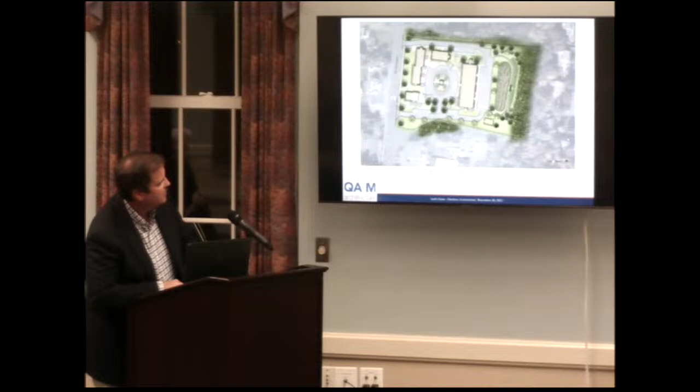And the driveway wraps around the backside of the building, if I could see where my cursor is. Sorry about that. It might be easier for me to point. You can pull the microphone off of that. Thank you, that's easier.

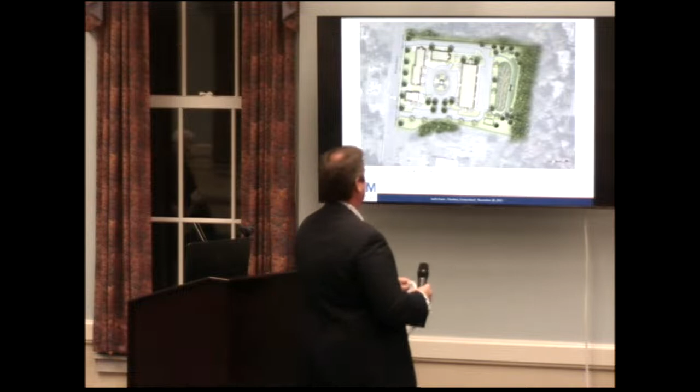The driveway wraps around the back of the barn building, which is the apartment building, and has parking in the rear.

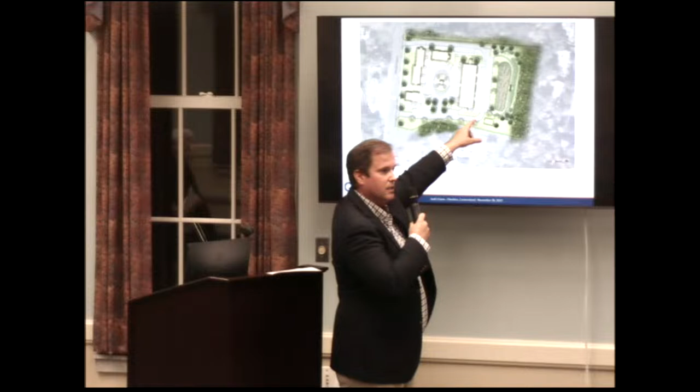Mr. Bowman, you need to let the audience see more than you need to let us see. We have everything up here on paper. I'm not sure if they can see it very well, but sure, I absolutely think that's better, thank you.

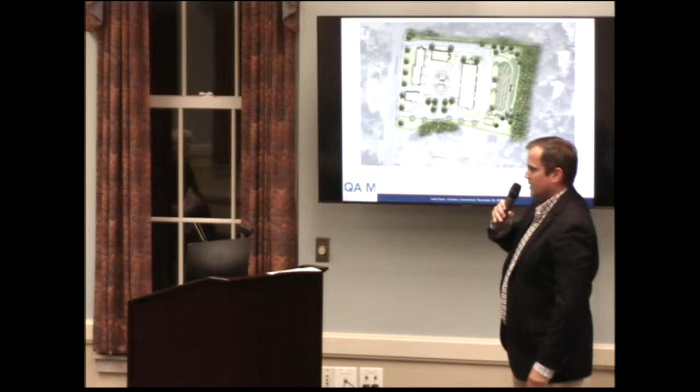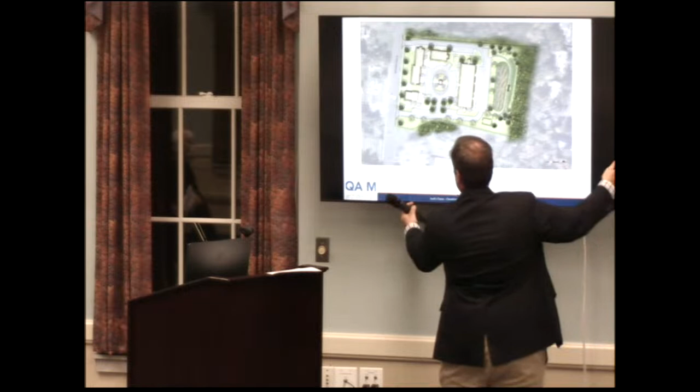And then around the backside, the driveway loops around and has an exit out the north. Oh, I don't think it- no, she's just asking if it actually does a little bit. Would you like me to try? Is that better? Sure thing. Would you like me to back up or would you like me to keep going?

I'll just describe it. So this is the south driveway, that's the north driveway as proposed. We have access that comes in here and there's parking along this. Thank you, that's helpful too. You can use a laser, but you can't use them on the screens.

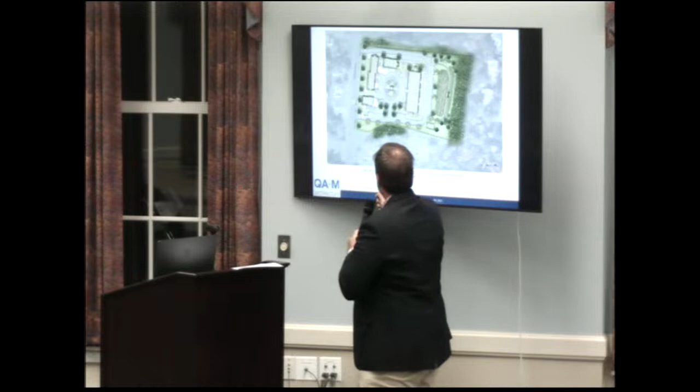So this is the parking, and this is the community building. This is one of the townhouse buildings, this is another townhouse building, and here is the barn building in the back. This is parking for the community building, and then you have this driveway courtyard here. As I mentioned, you have parking on either side, and then you also have a central focal point here, which has just a sort of rain shelter pavilion.

And then you come around this way with the driveway, which wraps around the backside of this building with more parking, and then outside and around to the north.

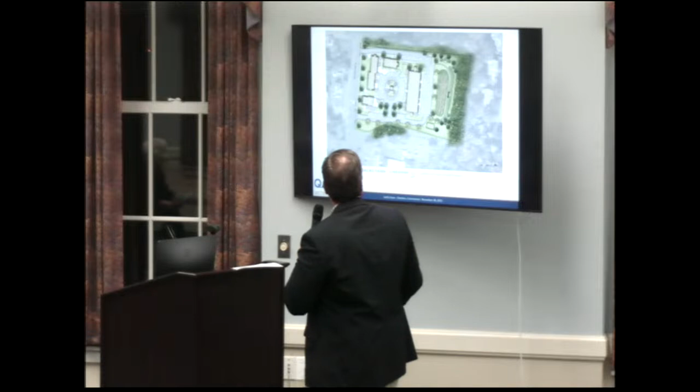We have Mr. Strollo with a question. From the rear parking lot of the farthest building, what's the property line measurement from the edge of the parking lot to the closest property line? I don't have that dimension, but I can tell you what the building is, and I can get you that dimension by the end of the presentation.

Mr. Bowman: you should get us the dimensions from the building to the nearest house, from the parking lot to the nearest house, and from the property line to the nearest house. I'd like to have all that information. House or property line? Property lines, so we know. Yes, I have the property— I have buildings to property lines, which is typical. But what about parking lot to property line? I don't have that.

That's not normally listed in a zoning data table. You have building to house? I have building to property line. Okay, if you could get us building to house too, I think that's going to help us a little bit. Well, I'm sure we could get a list of things you guys would like to see, and we can gather that for you. But as I go along, I'll tell you what we normally present.

I don't know if you can describe this big circle here going from one side to around? Yeah, I haven't gotten there yet, but I do have that in the presentation. I'm trying to figure that one out. Okay.

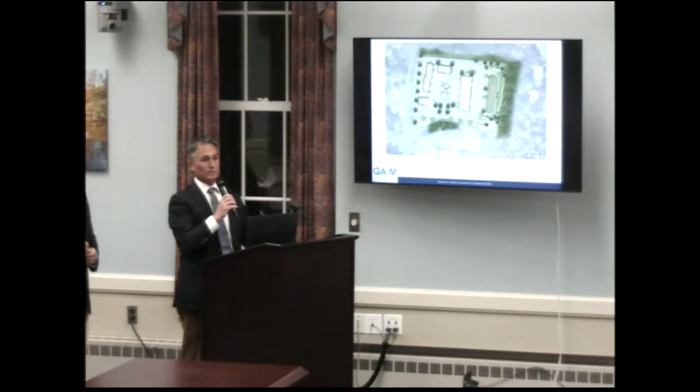Good evening, my name is Tom Arcari, principal with Quisenberry, Arcari and Malik Architects, 195 Scott Swamp Road, Farmington, Connecticut. If you look back at the original site plan shown here, the house sits on top of a berm, which is built up on the property. The property has this football-shaped berm, and the house is right at the peak of it, with the grade falling away to both sides. You can see it's 1, 2, 3, 4, 5, 6, 7, 8, 9, 10 feet to the street and a little bit more to the back.

In the development of the site concept, this oval-shaped drive is where that berm is, and then the buildings are actually tucked into the outside of the berm so they can sit lower. We're not building our proposed structures on top of that berm; we're building around it so they sit down.

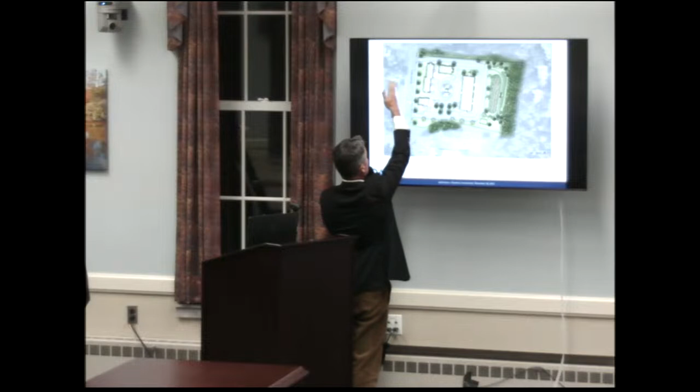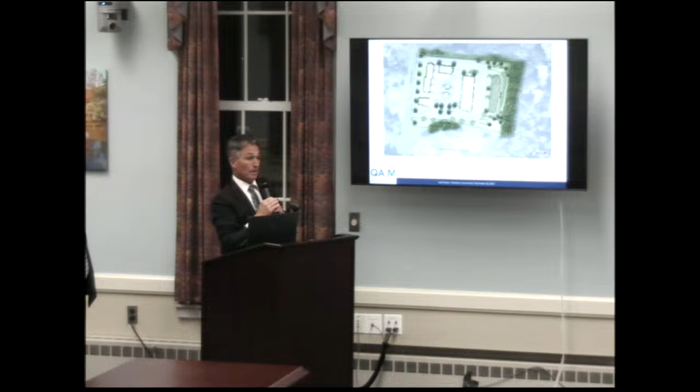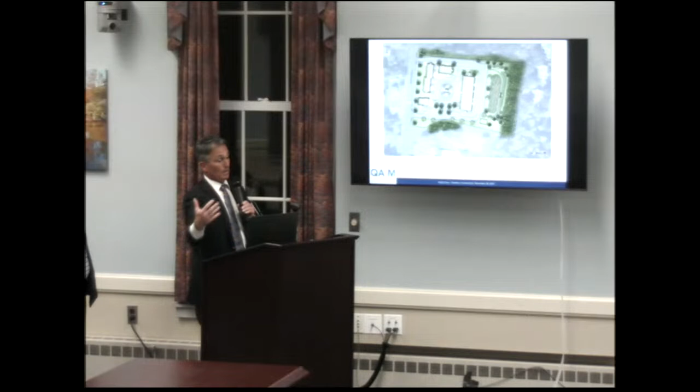So the townhouse structures, which face the street, are two-story structures with a roof. We'll have renderings thereafter. Our design team is here this evening, but they're two-story to match the house height of other structures along the street. The barn structure, or apartment building, is actually built into the hillside, so facing the street it's only a two-story elevation, and as the grade falls away at the back, it becomes a three-story elevation. We've used that berm structure to build the proposed structures around it — we're not building any of the structures on top of that elevation. Thank you.

Mr. Bowman? So your first floor elevation is 151, and actually South Main Street is 157, so it's 6 feet below South Main Street — if I can still read a map, which I think I can.

No, you got it. Oh, it's a little bit higher. 60, 155 here. I can't see it on there. Yeah, go for it. Thank you.

So the 151 elevation is the first or lower level of this barn structure, which is 6 feet below the street. The mid-level of that building is 10 feet above that, at 161, which sits about 2 to 3 feet above the cut-down grade of the top of the hill. We have to keep it pretty close so we have accessible structures. That's correct, you're building lower, not higher, than South Main.

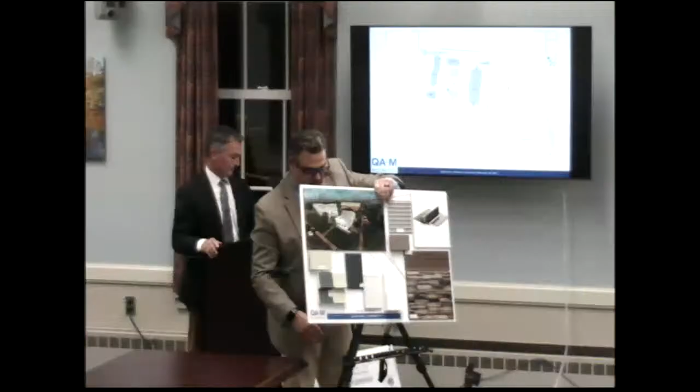Good evening again, thank you. Maybe over in front.

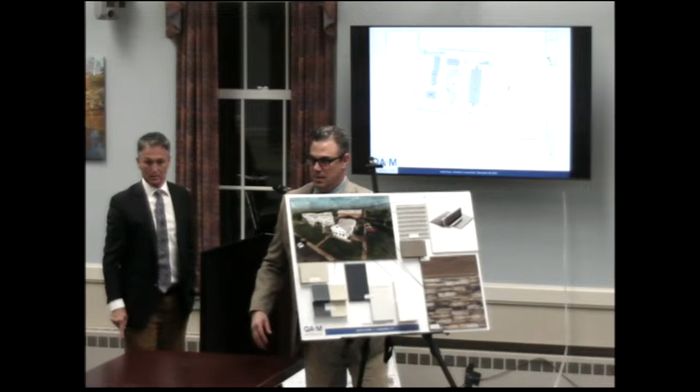As Ann Belcher mentioned, we brought this to the town about 6 years ago and made a presentation about the concept. The concept was based on a farmhouse type development, capturing the architecture of historic Cheshire, and New England in general, where properties were developed over time with a series of structures built up through additions and renovations, so the scales of the structures were relatively small, and the barn was placed to the back of the site as a more utilitarian, functioning building. The concept we came up with keeps in that style.

I'd like to introduce Rocco Petito from my office, who was our chief designer on the project, to present the concept to you. I'm Rocco Petito, project architect for Quisenberry Arcari Malik Architecture in Farmington, Connecticut, at 195 Scott Swamp Road. We'll just briefly go through the buildings.